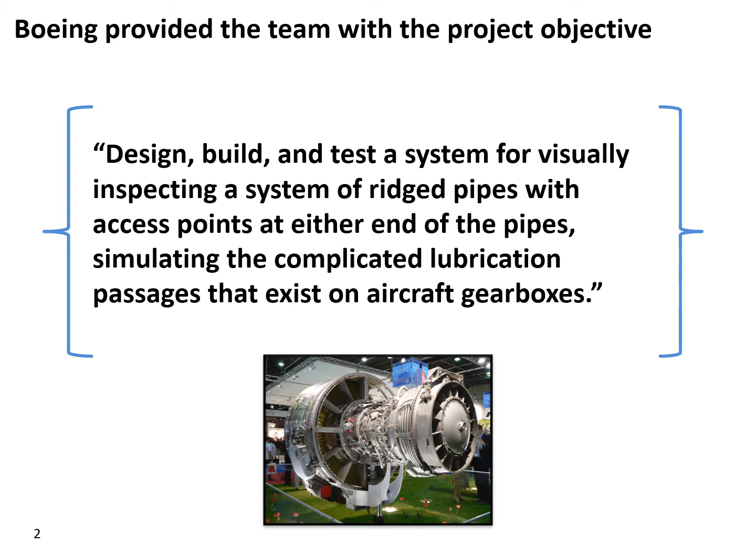I am Andrew O'Donnell, the project manager of this report, and I will be guiding you through the showcase today. Boeing gave us our project objective, which was basically to build a design that improves upon the quality assurance tools used in the industry today to inspect the inner workings and pipings of gearboxes for any defects or chips that could be harmful if put into use in aircraft engines.

Due to limitations this year with COVID, all of our meetings and documents were exchanged virtually online through Zoom, WebEx, or Microsoft Teams, and this allowed the team to work from our remote locations at the same time.

Before moving into concept generation, the team had to see what was out there on the market and have something as a reference. So we bought a Depstech borescope. This borescope had no guide system, a Wi-Fi connection, a 2-megapixel camera, and this would serve as our basis for comparing our prototypes later in terms of performance.

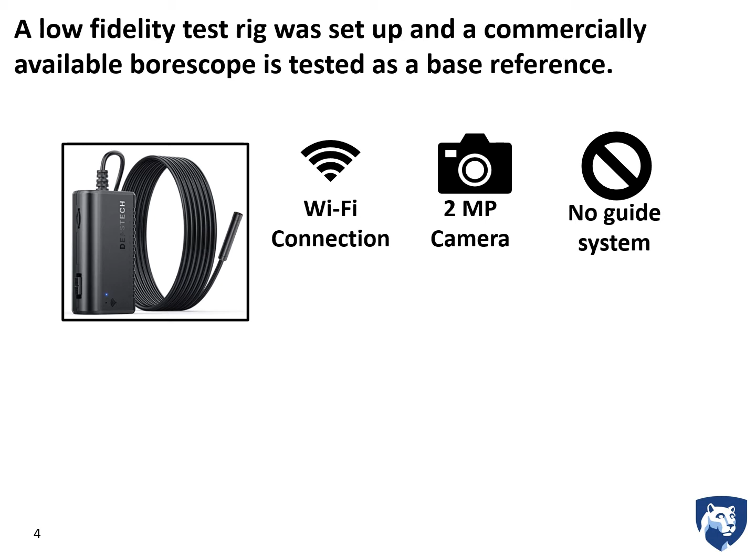This pipe system here is one that is meant to simulate the kind of inner workings you would see in a Boeing gearbox. We placed it through here to see what kind of problems erupted when putting it through all these turns, bends, and angles.

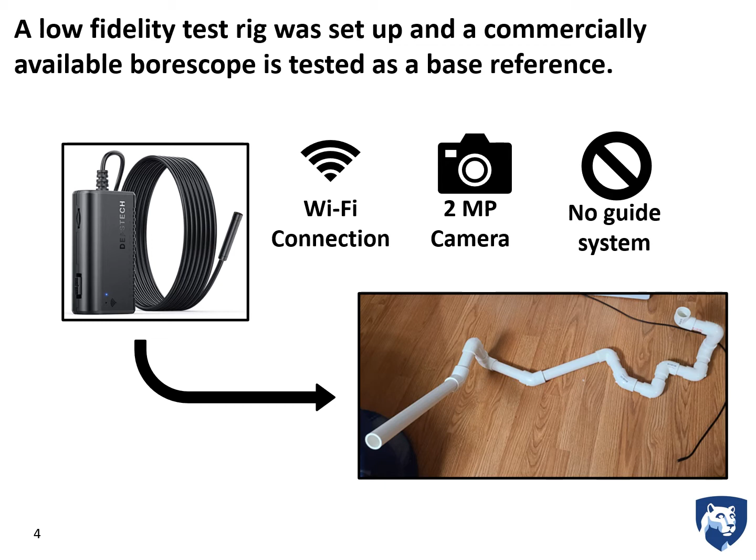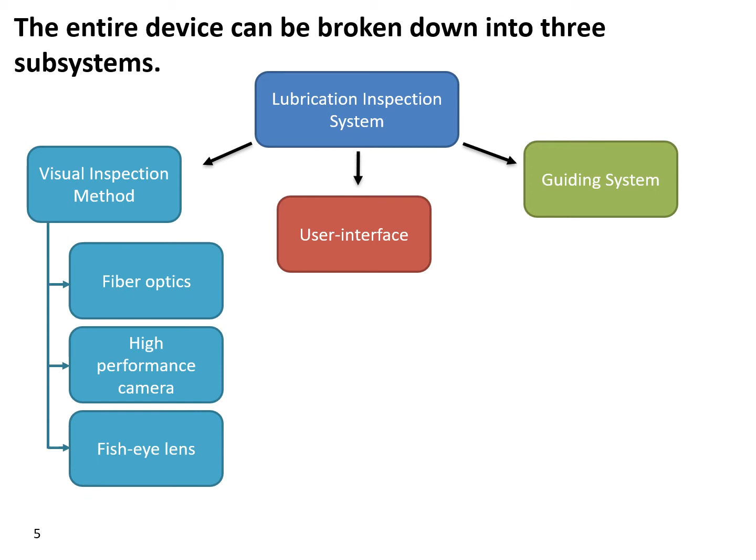The entire device was then broken down into 3 subsystems for which we generated concepts: the first being the visual inspection method, the second being the actual user interface, and the third being the guidance system through the piping system.

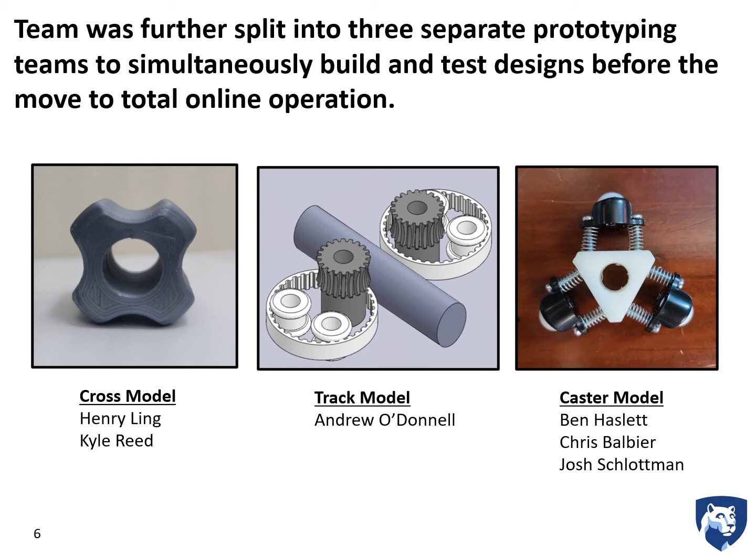From there, the team was split into 3 separate groups that worked on the prototypes that arose from concept selection. We weighed the concepts against each other and against our customer needs, and the best ones that arose we turned into physical prototypes, in terms of the cross model and the caster model, and then tested them, while the track model was maintained as a CAD model prototype.

In terms of performance, the caster design had very good centering, alignment, maneuverability, adaptability, and about the same ease of use. This one generally was an improvement upon the typical reference borescope, and it's a type of attachment that can be easily put onto the borescope systems to help it maneuver better within these passages.

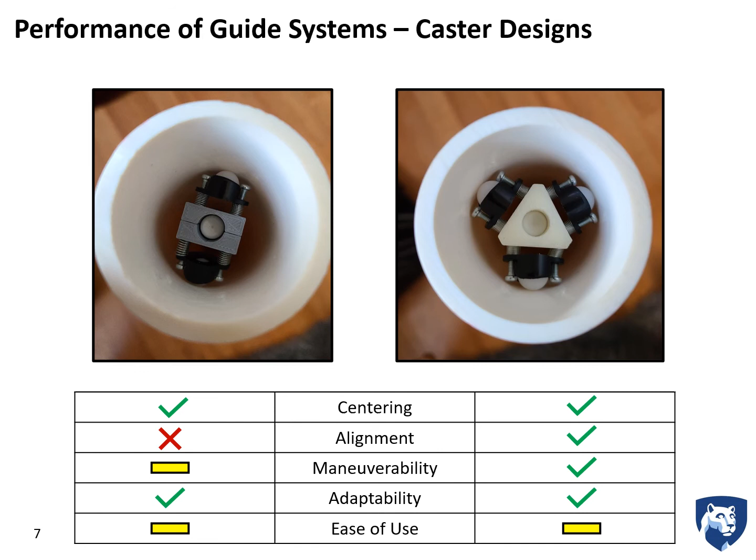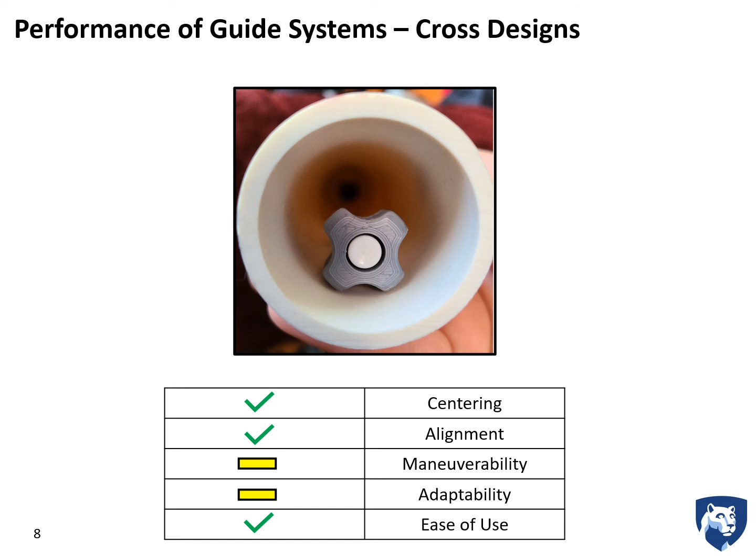The cross design had better centering and alignment, about the same maneuverability and adaptability, and a little better ease of use, but it was so simple that it may have trouble making these turns, depending on the size and type of material used. In this case, it was just PLA plastic, but we think another material, such as a more sliding plastic that doesn't harm the surface, could also help with maneuverability.

Our deliverables to Boeing in the end were a generalized case study showing physical models and how they would perform. We gave this data to Boeing so that they can further make high fidelity prototypes, ones that might be better suited to their needs.

And that is how we went through the project for the entire year.